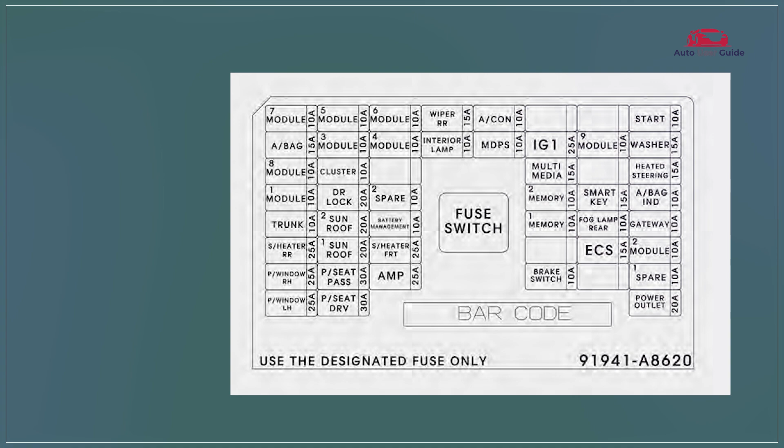Driver's side fuse panel. The driver's side fuse panel in the 2020 Kia Optima Hybrid houses essential fuses that control various electrical systems such as lighting, power windows, and mirrors. It features an organized layout with clearly labeled fuses for easy identification. The panel also includes a fuse puller tool for convenient fuse replacement.

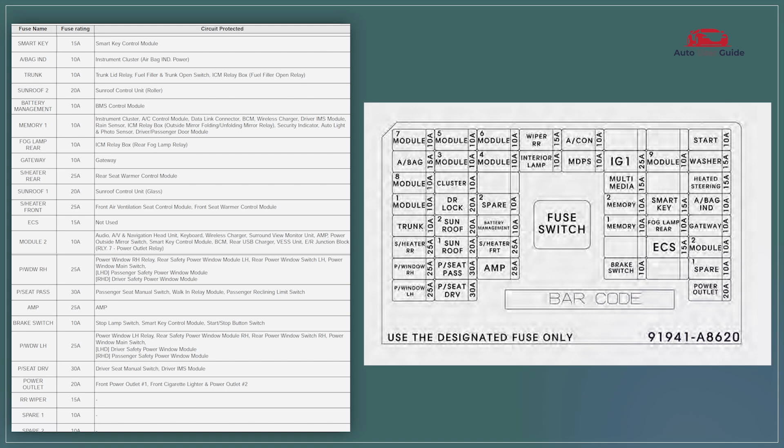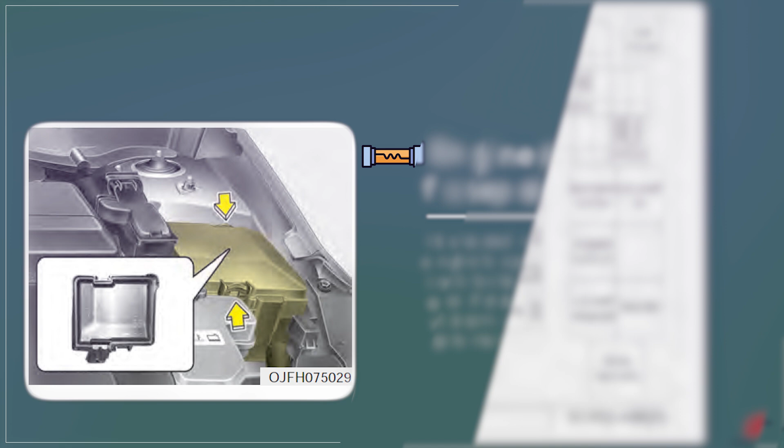Engine compartment fuse panel for hybrid. The engine compartment fuse panel for hybrid vehicles provides power to essential systems like the engine control, electrical components, and hybrid system. It ensures reliable protection from electrical overloads and short circuits. The panel is typically located near the battery or within the engine bay for easy access and maintenance.

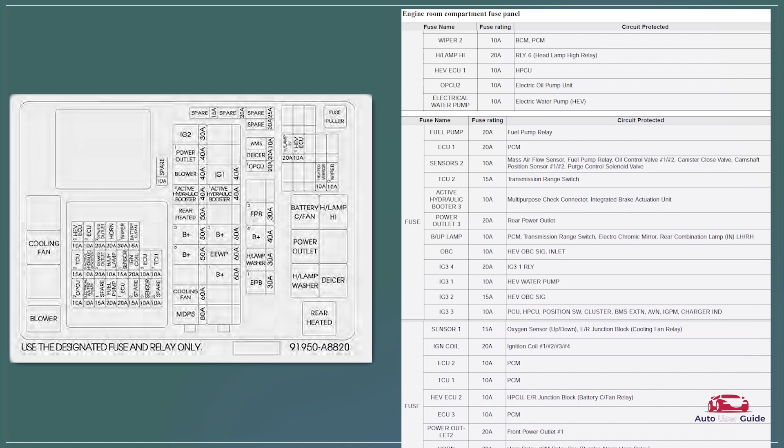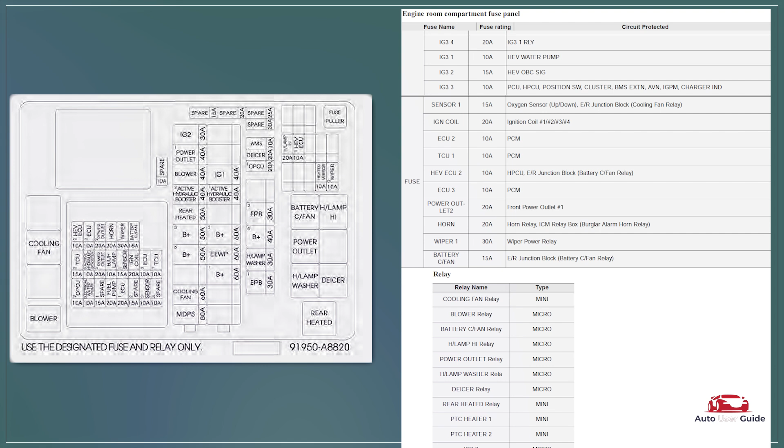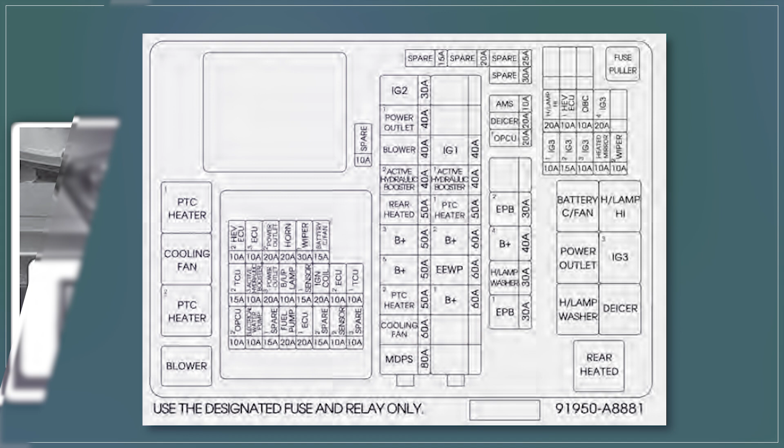Engine compartment fuse panel for plug-in hybrid. The engine compartment fuse panel for the 2020 Kia Optima plug-in hybrid features high-capacity fuses for key systems such as the plug-in hybrid powertrain, battery management, and charging system. It is designed for easy access with labeled fuses for quick identification and replacement. The panel is housed in a durable, weatherproof casing to protect critical components from environmental elements.

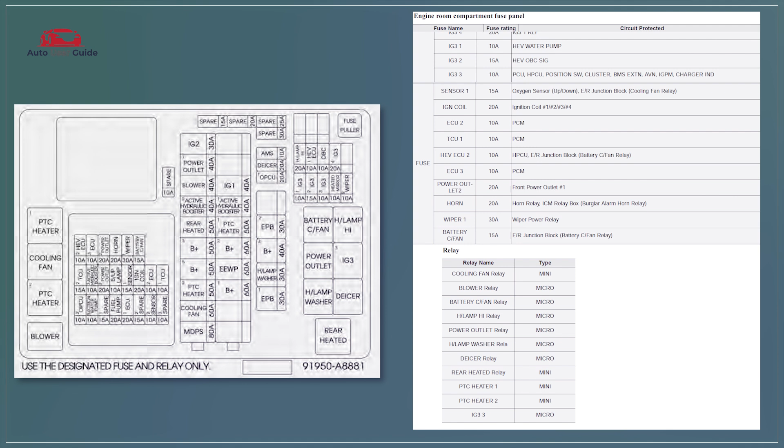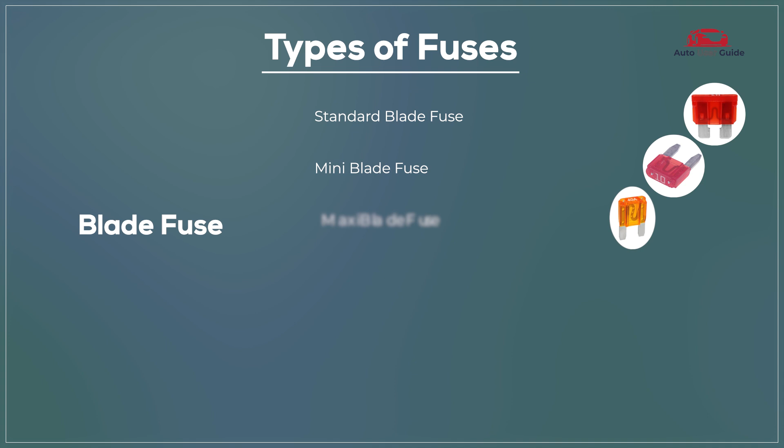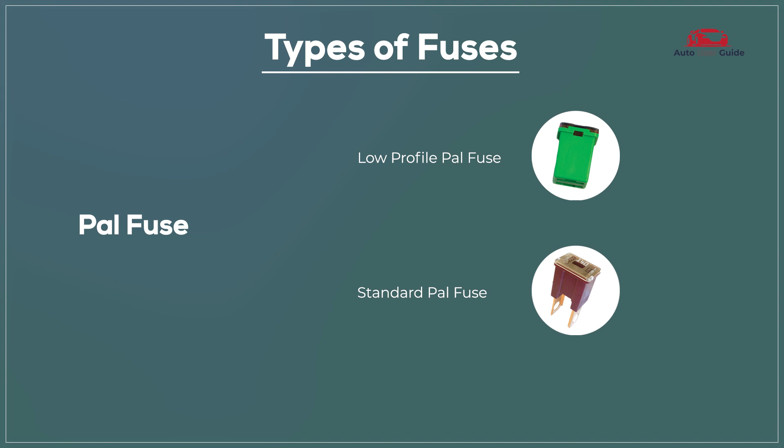Types of fuses: blade fuse, standard blade fuse, mini blade fuse, maxi blade fuse, micro 2 fuse, micro 3 fuse, J-case fuse, glass tube fuse, AGC fuse, SFE fuse, ceramic fuse, Bosch fuse, DIN fuse, PAL fuse, low-profile PAL fuse, standard PAL fuse, link fuse, mega fuse, high amperage link fuse.

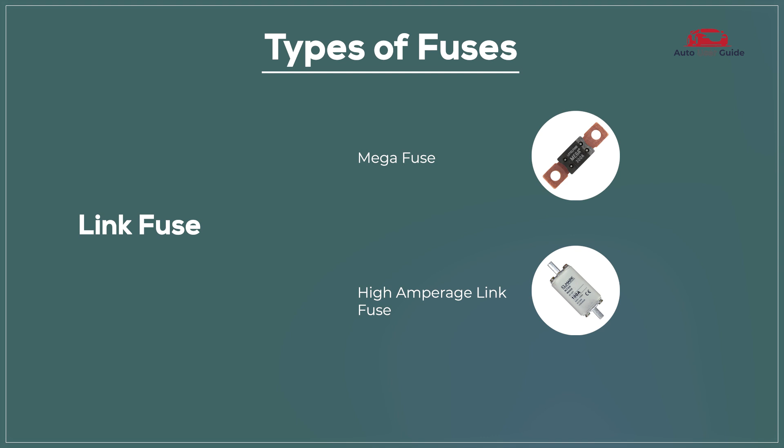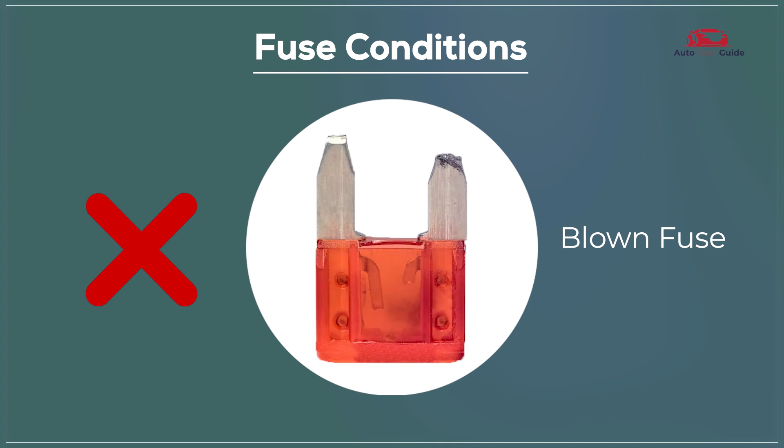Fuse conditions: blown fuse. A blown fuse means it's no longer functioning and needs replacement, while a perfect fuse is in good working condition and performing as expected.

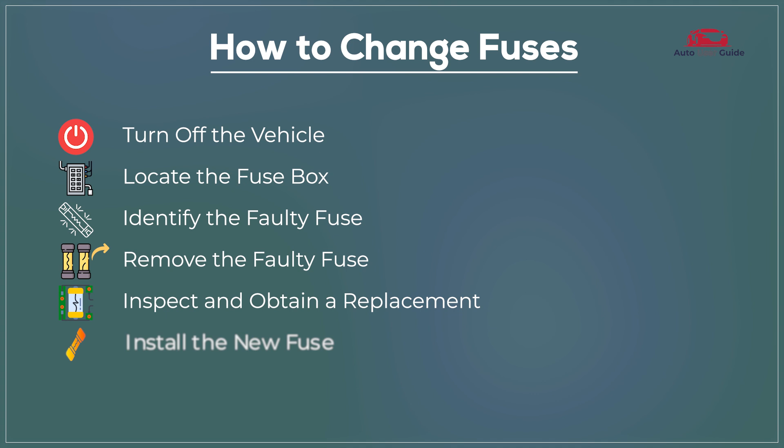How to change fuses: Turn off the vehicle. Locate the fuse box. Identify the faulty fuse. Remove the faulty fuse. Inspect and obtain a replacement. Install the new fuse. Test the replacement.

Safety precautions: Disconnect the battery. Wear protective gear. Use proper tools. Check for correct amperage. Avoid water exposure.